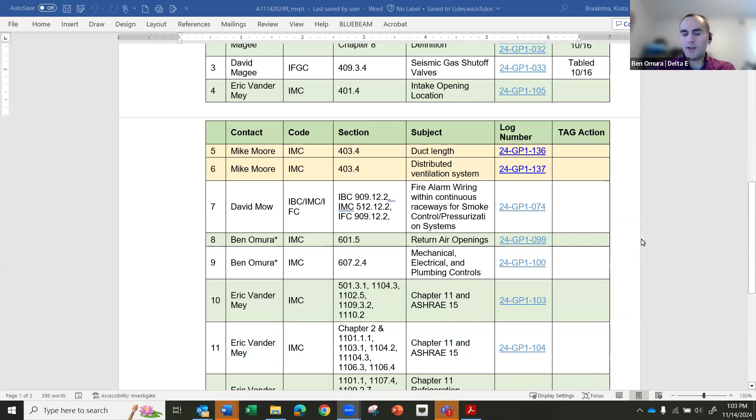Okay. All right. Let's move on to the next item on the agenda, which is to review and approve the agenda here. So take a quick look. Looks like we have the minutes from last meeting, and then the bulk of the agenda is taken up with code change proposals for the mechanical code and fuel gas code. And you'll note these two highlighted ones didn't appear on an earlier agenda. We got them as revised proposals just before the deadline closed for revised proposals.

Got it. And Krista, I did have a question regarding that. If we needed to have the MVP committee or the building code council provide direction if the tag was to review those and provide recommendations on them, or are we going to be limited to just discussion today for those two? I would say that we have a discussion and form a recommendation on it, and then it's up to the council and the committee if they want to consider them. Okay, sounds good.

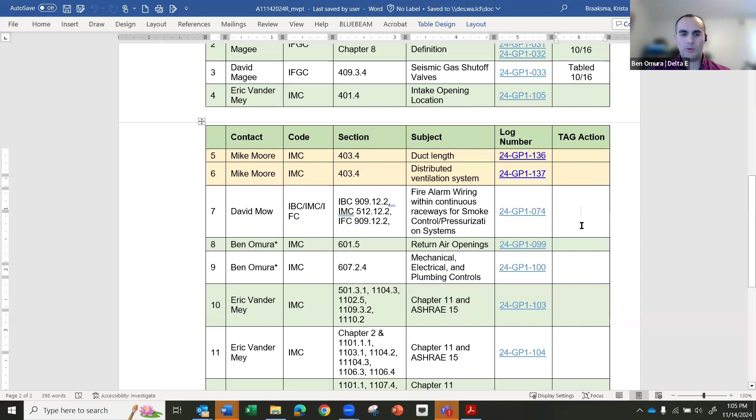All right, any other? I'll move for approval of the agenda. Okay. All right, we have a motion for approval of the agenda. Do we have a second? Yeah, I'll second it. This is Steve Simpson. All right, second from Steve. All right, any discussion regarding the agenda today? All right, hearing none. All those in favor of approving the agenda as shown here, please say aye. Aye. Aye. Aye. Any opposed? All right, hearing none, motion passes.

So let's go to the next item, which is to review the minutes from the October 16th MVP tag meeting here. All right, are there any comments, or as we scroll through, if someone wants to make a motion to approve, we can. I'd like to make a motion to approve the minutes as sent out and posted here on the screen. Second that. All right. Motion from Steve and seconded by Bill. Any discussion regarding the minutes from the last tag meeting? All right. Hearing none. All those in favor of approving the minutes from the last tag meeting, please say aye. Aye. Aye. All right. Any opposed? All right. Sounds good. Motion passes.

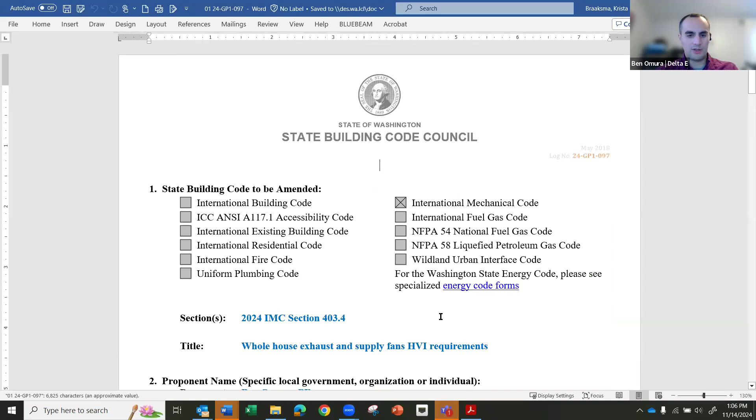All right, so we can get into the agenda here. Looks like we had 3 code change proposals that we had tabled from the previous meeting. The first being one that I had submitted regarding HVI requirements and certification requirements for unitary systems. And we had tabled it since we got some good feedback from some folks on the call last time, and I wanted to try to bring some other people that could provide testimony for it here. So the proposed change would be to provide an exception for unitary heat pump appliances, which may include integral ERVs, from the HVI testing requirements.

And we had heard some feedback at the last tag meeting that the HVI certification process did not seem to be so burdensome as for manufacturers to pursue it if desired. So I'll leave it there. I know Nick, you're on to maybe speak to this, and then if there's any others, please raise your hands so we can have a little bit more discussion on this item.

Yeah, I'll go ahead. I'm going to ask a question, Ben. So specifically, HVI deals with the sound at the design airflows. Is that correct? Yeah, and I think we have a couple of HVI standards here. I believe they're for sound, and I believe they also cover airflow as well. It's my understanding. So we have the 3 HVI certifications there that these would be tested under and certified under.

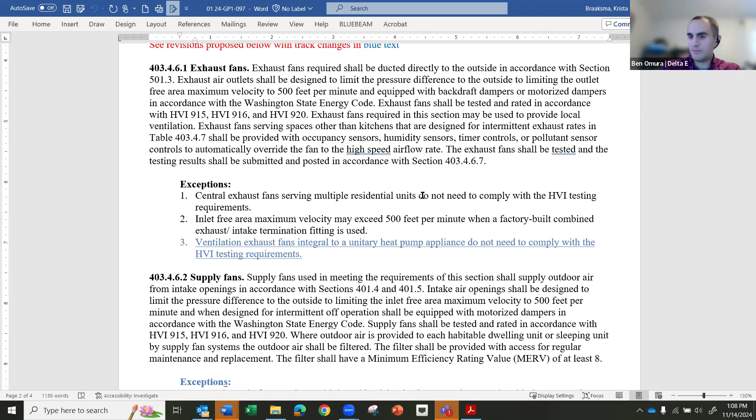Understood. And then I think I saw an update yesterday or the day before that was actually going to remove kitchen range hoods from requiring HVI certification. Is that correct? Yeah, I believe that is another one of the code change proposals that we'll be discussing today. Okay. So obviously we want to eventually consider things holistically, but we do want to try to look at things as isolated, siloed proposals to bring forward for more of a holistic review moving forward. Okay. Yeah, we'll hear if anybody else has any feedback for us.

Shailesh, go ahead. I think the purpose of this sort of testing is to make sure that we have adequate air being replaced or taken out. And so the testing is important in that case. We should not exclude any other equipment because it does save energy is one thing, but we want to make sure that it does take away the air or replaces as it was designed.

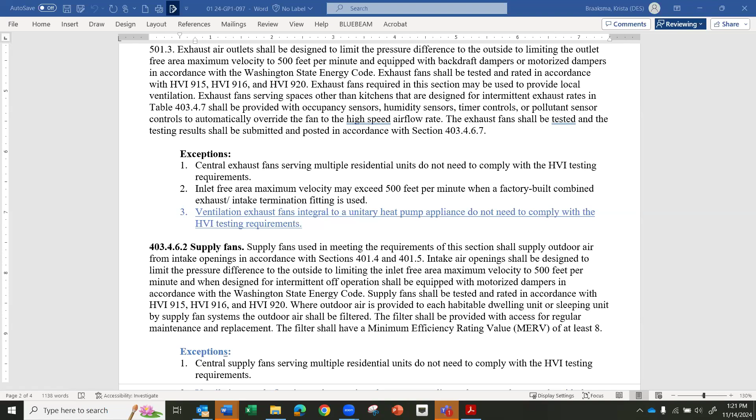All right, thanks, Mike. Any other comments regarding this code change proposal? Eric, good. I guess depending on the preference of the TAG, if we're not going to move forward with it, then you could just withdraw this proposal, and if you don't, that is another potential path, right? Thank you. Yeah, thanks for that. And I think maybe if the TAG doesn't feel like it's worthwhile to pursue at this moment, we can definitely remove it. And the language that's in the current mechanical code would remain.

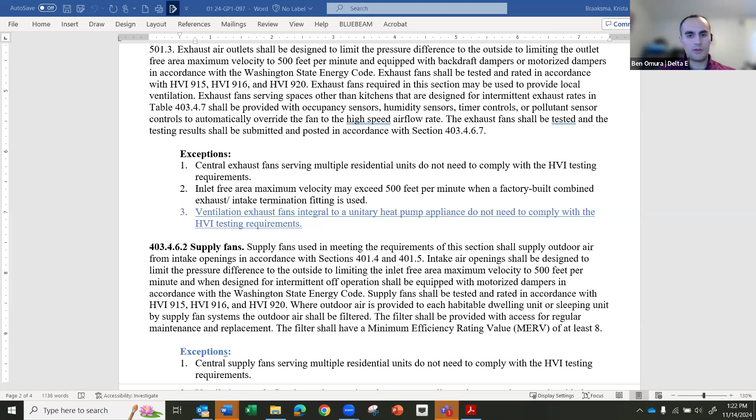So I don't see any issue with that at the moment, given there's a varying degree of uncertainty around what this would do and if there is still a pathway for these manufacturers to comply with the code as written. So I think we can move on, and I'll take a look and potentially submit a request to remove this code change proposal, unless there's anyone that wants to take any additional action on this item. All right, Krista, can we move on to the next one?

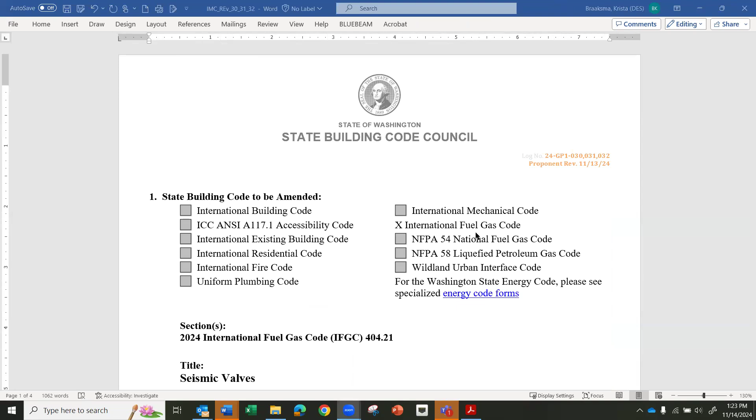And I apologize, I just got this revised version. It is posted on the website, but it was only posted this morning. So this is the first time. All right, and if someone had downloaded it, like me, for example, would it have the November 13th date on the bottom there? We're looking at it. Probably. Okay. All right. Yeah, it's like the older version. Okay. So this is one we had tabled from last meeting.

This is regarding, I believe, the seismic valve requirements for, I don't know if it's just natural gas or fuel gas lines serving buildings or structures. So we discussed this a bit at the last meeting, and I think the TAG in general had some concerns regarding the broadness of the language and some other things. So I don't know if Mike or others can speak to the revised version and what, if any, steps were taken to address some of those concerns.

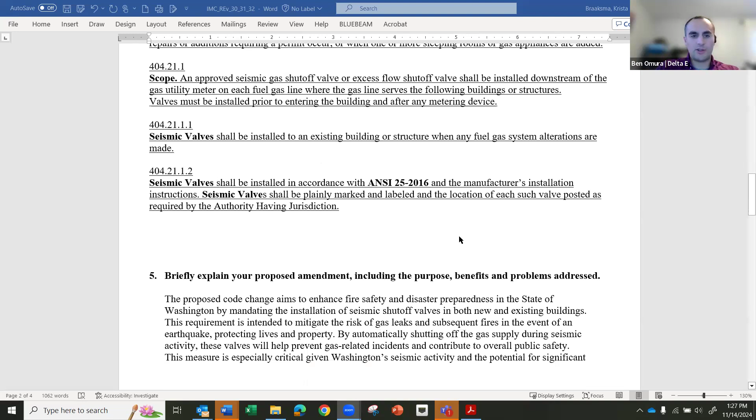All right, thanks, David. I don't know if anyone's had the chance to review it, so maybe we page through here as we discuss. Shailesh, go ahead. Yeah, on 404.21.1.1 seismic valve, it says when system alterations are made. Now, alterations to what extent? I believe my intent was in the case of, say, a meter change, or an addition of a gas appliance, or the removal of a gas appliance. An alteration meaning work done on the gas system that provides the service to the building or residence. Well, changing an appliance like for like, do you consider that an alteration?

Well, see, that's why I'm not really good at writing building code. This is my first time, so that's why I'm bringing it to you guys to maybe make it better, because I'm just a guy.

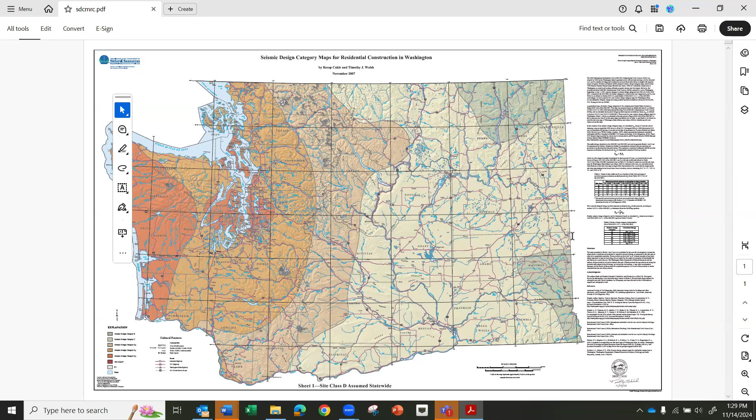Laura, go ahead. Yeah, and maybe we'll see as we flip through this, but I'm just curious if there is a map that shows the D2, D1 seismic categories included in this? And then the other question would be, does this apply to all different occupancies and restaurants? Like, is it applicable to residential and that sort of thing? Just curious if it's included in residential and all commercial projects?

Yeah, so originally I wanted it to be more targeted towards schools, healthcare facilities, memory care facilities, KinderCares, where kids are, things like that. But I included it in the groups E, H, I, M, R-1 through R-2, R-3, R-4. I don't know those classification codes really well, but I mainly picked those ones because they represented the places that had the most gathering of people within structures.

Right, and then, yeah, I think Krista had highlighted where that got added in the proposed language for 404.21. Steve, go ahead.

Okay, yeah. So I did have a prior conversation, but I'm looking at this and I don't see anything in here from the utility provider, or what kind of background history you can use to validate other than a map, identifying whether the infrastructure providing the gas service would or would not be able to withstand a certain level of movement before it became compromised, thereby nullifying a seismic valve. Without that context, I would not be able to say emphatically that I agree or disagree with any of these sections, because I would not be aware of what fragility the system is in its current state, meaning that based on its non-maintenance, its age, or the way it's structured, the gas utility provider could, in a small seismic event of 3 to 4, become compromised, and a seismic valve would be basically of no value.

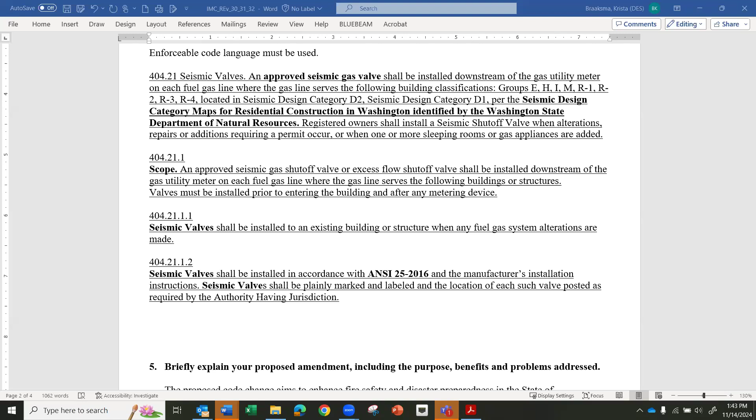And then another question I had is there are some very limited examples given for the cost that this will incur, and I noted that, I'm not real familiar with Mr. McGee's company, but it looks like they are an installer of these valves, and we saw an example for a small commercial facility, and then maybe a larger one, and I'd like to see a more comprehensive cost analysis done, because I think this will have a lot of effects on people and the costs.

Additionally, one of my questions is this is an installer who installs these valves. It does appear that there is a conflict of interest in this. And I'm concerned that this has a big cost associated with it if it gets put forth in the code. Anyway, those are my comments. Thank you.

All right. Thanks, Brian. Steve, go ahead.

Yeah, I want to tag into that last comment about cost. I did read this portion on the cost, but what's been addressed here is not identified in this cost analysis, and that is the fact that, if I'm correctly hearing, there would be additional needs for testing the system to the interior portion of the building, as well as if it were an old school gas appliance with a pilot light that had to be lit, then there's that added cost versus electronic arc or another form of ignition.

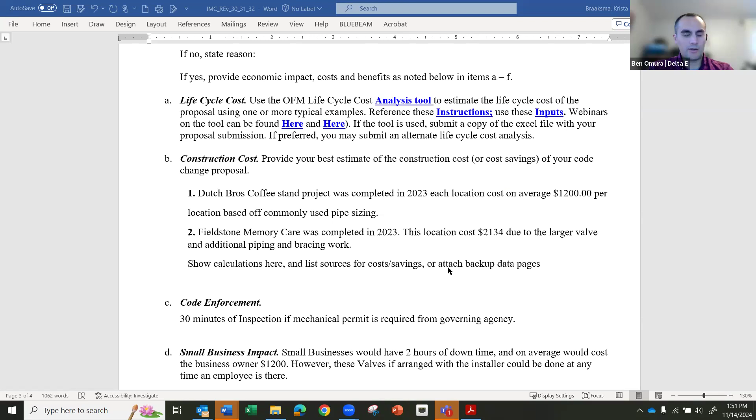I spoke with one of our servicemen who had previously worked in Southern California, and they had a number of these installed across their territory. Some of these were tripped from, you know, you could hit it with a trash can and they would get tripped. What I understand is that organization had adopted an approach that echoes what was mentioned previously, that it becomes a longer process to get turned back on. And it became such a nuisance that they were charging people when they would trip it, so that people would be really careful to not bump that.

I think safety is paramount. I just think we need to really look at, to use a gas term, the downstream consequences of this, and consider the operational costs, the installation costs, the potential impact to disadvantaged communities that are going to be forced to upgrade things. And also, I haven't had time to evaluate this, but it looks like we changed the occupancy classifications, and I'd like a little more time to look at that than we have in the scope of this meeting. Thank you. That's my comment.

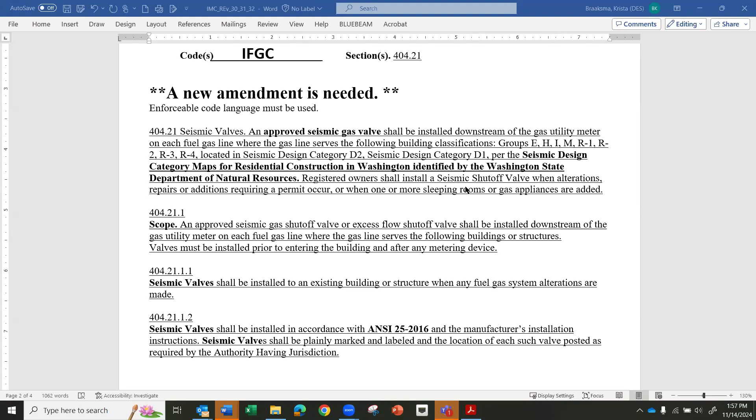All right, thank you. All right, so motion is to table this item, and would you want that to include not only this code change proposal but the other related one, GP 133 as well? Since I'm the motion maker, I think it would be probably the same kind of conversation, Mr. Omura, and once again, I would agree to that. As a second, I agree to that too. Right. So motion would be to table this code change proposal as well as GP 1-033 until the next TAG meeting, which we should be scheduling shortly.

Any discussion regarding the motion? All right, hearing none, all those in favor, please say aye. Aye. Aye. Aye. Any opposed? All right, motion passes. So thank you for the discussion on this, and we'll look forward to hopefully resolving TAG discussion on it at the next meeting. All right, let's continue.

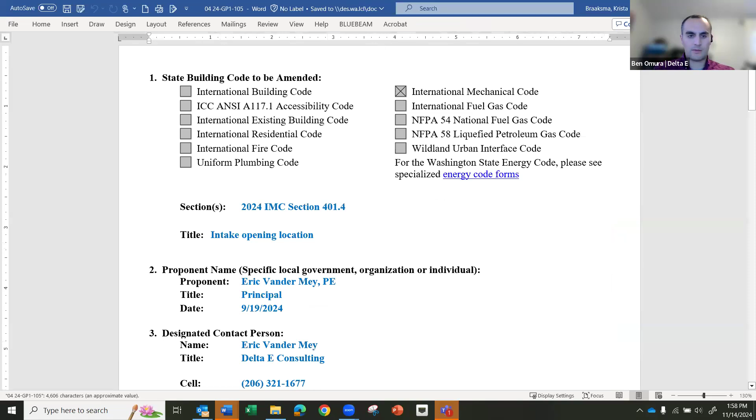So Chris, I don't think that we've looked at this one yet. Is that right? No, we haven't on this one yet. Okay. And it looks like it's editorial more than anything else. Correct. This is Eric Vander Mey. This is an editorial correction to move up this exception that's kind of floating at the end of the section to be under item 2 of section 401.4. This exception is just applicable to item 2 only, so it's really just a renumbering editorial correction in the code for clarity.

All right, great. Any discussion? And Laura, go ahead. Yeah, I remember us talking about this during the TAG, and so I'll make a motion to accept this code change proposal as written. Thanks, Laura. Is there a second? This is Bill, I'll second that. Thanks, Bill. All right, any discussion for this proposed change?

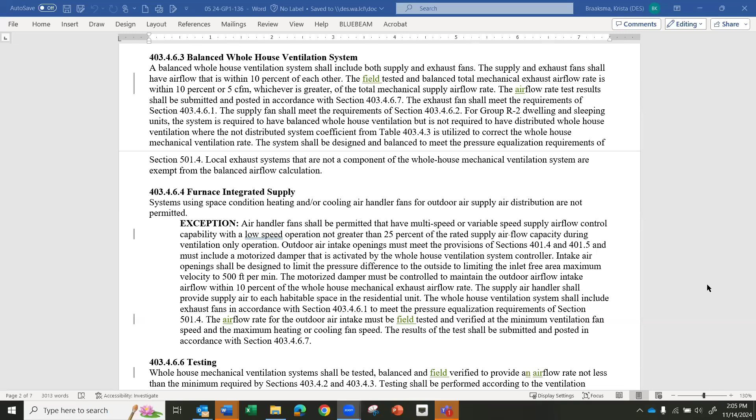Just clarifying airflow, using consistent terminology throughout. So airflow instead of flow. Again, field testing, where field testing applies. If you'd scroll down again, please. Okay, thank you.

So again, more clarifications around laboratory testing underneath number 1 there. In number 2, I just collapsed number 3 and number 2. Number 3 is designed in accordance with manufacturer's installation instructions. So I just started number 2 off by saying the system shall be designed and installed in accordance with manufacturer's instructions. And then all this information about how to test the airflow, I just parked it in section 403.4721 because that seemed to flow better with cross-referencing from other sections. So this is essentially the same as is currently written. It just is trying to clarify the requirements here.

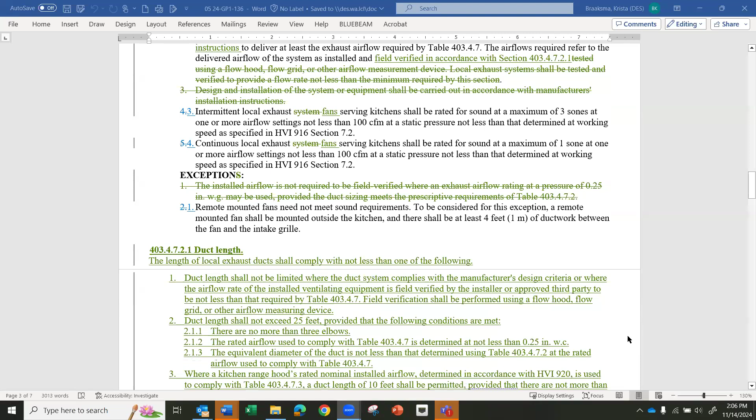I use exhaust fans instead of exhaust systems, where fans are appropriate to reference, in number 3 and number 4. And then exception number 1, I did retain that. I just put it elsewhere because it flowed better, in my opinion, to put everything underneath duct length. So really, when you're confirming duct length, I'm proposing there are 3 options. Currently, there are 2 options in Washington's code. The first is that you do this field test and you verify the airflow on site. And the second is that the ducts are prescriptively sized using this prescriptive exhaust duct sizing table.

A limitation of this exhaust duct sizing table is that it only goes to 125, I believe, CFM. And there are certainly range hoods that far exceed 125 CFM. But instead of this table, we use the ASHRAE 62.2 table, which is right below. Thanks, Krista, doing a great job there. This shows the duct diameters that are permitted for rigid and flex duct for various fan airflow ratings at a 1/4 inch water column of pressure. So this is, again, copied right from 62.2. It's more flexible than Washington's current code. It allows sizing to higher airflows than are currently permitted by the table, and again is aligned with 62.2.

If you'll scroll up just a little bit, Krista, so that would be option 2, prescriptive sizing in accordance with 62.2 in place of the current prescriptive exhaust sizing table. And you don't have to go to 62.2 to do the prescriptive sizing. It's right here in the code. The third is using nominal installed airflow, which is a recently released metric from HVI in HVI 920. And it basically just looks at the static pressure that a kitchen range hood is likely to encounter when you have 10 feet of duct and 2 elbows.

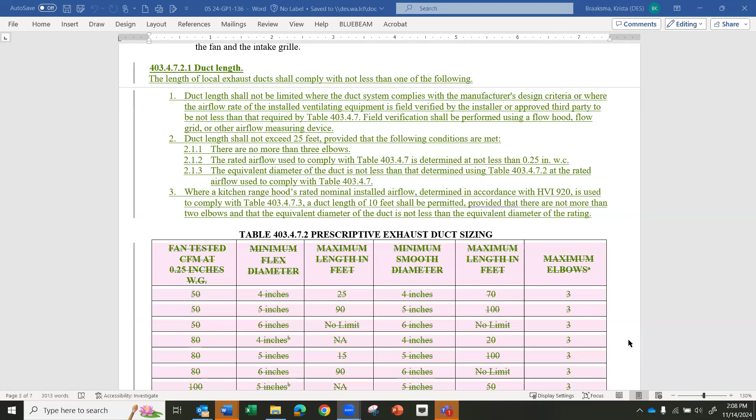And then it looks at the airflow that you're going to see based on the fan curve for that range hood, the certified testing points. You calculate the airflow of the range hood based on that system curve fit. So again, it's a rated value, and it applies to 10 feet or less of duct and 2 elbows or fewer. So just wanted to recognize that as being a way to prescriptively size ducts as well.

And I should point out that there is a slight error in number 1 that I noticed in reviewing this. We should cross out "where the duct system complies with the manufacturer's design criteria" underneath number 1 in the first line there. That's already required up above. And it's not an either or, it's basically saying that where your airflow is field verified here, that's one way to comply. Okay, if you scroll down a little bit more, please.

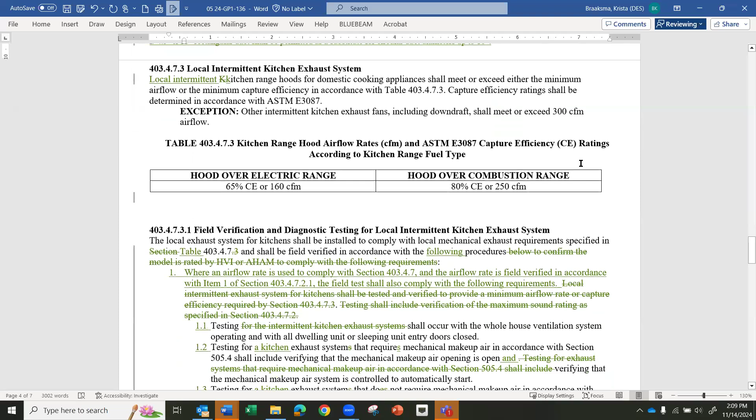All right, the next thing is just clarifying the kitchen range hood requirements and diagnostic testing for range hoods. And one thing that I saw in here is that instead of referencing again how to test the airflow, we just go back and reference section 403.4.7, how to field verify the airflow. And then when you're doing this airflow test, you have to do these things. So this is just tying everything together.

And I also brought in a reference to capture efficiency value, which is currently recognized in the code, but it's not required to be field verified here. It's not referenced at all. It's just saying you need to field verify the rated airflow value. But really, if you're using a capture efficiency value for compliance, you should be field verifying that as well. So a lot there. And maybe this could be workshopped. If you guys are just seeing this for the first time, I'd be happy to work with any interested parties if you need some more time to digest it, but happy to answer any questions now.

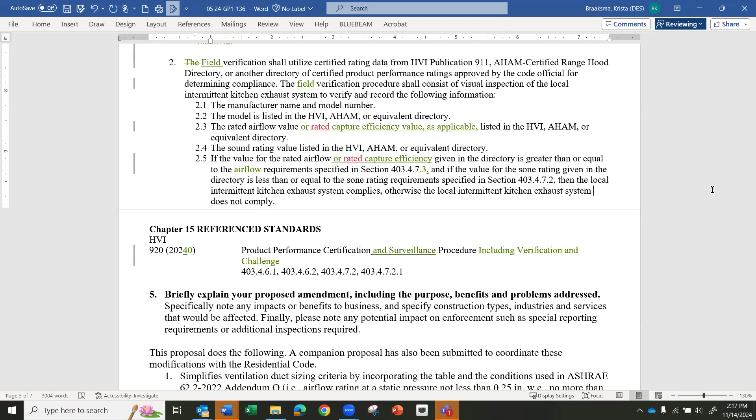Everything that's certified by HVI right now is certified in accordance with the latest version of 920. So that's the one that's in effect. So it's just keeping pace with 920. The latest version does include the metric for calculating nominal installed airflow, which again is the intersection of the typical system curve and a fan curve to estimate the in situ performance of a range hood as far as airflow goes. And so that's the primary difference here, just the availability of accessing that rating as an option as proposed in the code.

Yeah, thanks for going through that. Great. Any other questions or comments regarding this proposed change? And I don't know if we would want to make a motion to provide just kind of a general direction that the TAG would propose, or we could, of course, have this tabled for additional discussion at the next TAG meeting and give folks a little bit more time to evaluate the proposed change.

Laura, go ahead. Yeah, I'd like to propose to table this code change proposal till our next meeting, just to give me a little more time to go through the proposed changes. Okay, that sounds like a motion. I'll second it. All right, Justin, second. Motion and second. Any additional discussion regarding this?

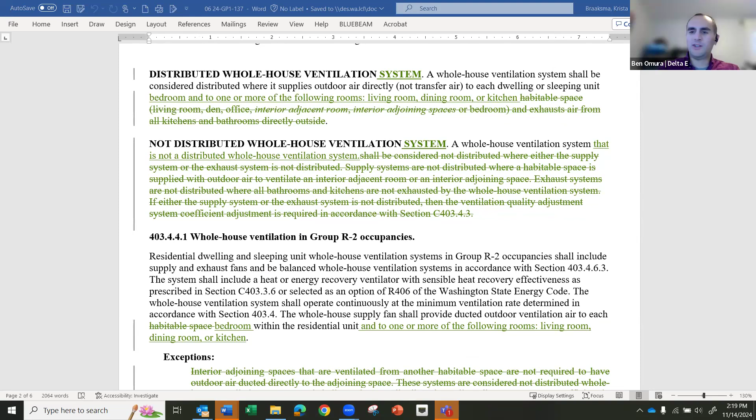And this is the same as the previous one. It was a late poster. Came in with the other one. And Mike, I think you were the proponent on this one as well. If you would be so kind to provide a little bit more background on the intent and what the proposed change would be doing here. You bet. And thanks everybody for hearing that last one. If there are any questions in the interim, I'd be happy to respond to those. My email and contact information are on the proposal.

So this one is looking at better aligning the current mechanical code and residential code eventually, because I have a similar proposal that'll be submitted there with the model code, with respect to what is considered distributed. So right now, the model code says that a system is considered distributed when it provides outdoor air to each bedroom and to one or more of the living room, dining room, and kitchen.

And that is contrasted with Washington State, which requires distribution of outdoor air to each habitable space, which in parentheses includes interior adjoining spaces, and you need to exhaust air from all kitchens as well as bathrooms directly outside. So if this is one system that's exhausting air from kitchens as well as other spaces, that's a direct violation of the mechanical code, which requires that separate exhaust be provided for kitchens. You can't combine kitchen exhaust with environmental exhaust from like bathrooms.

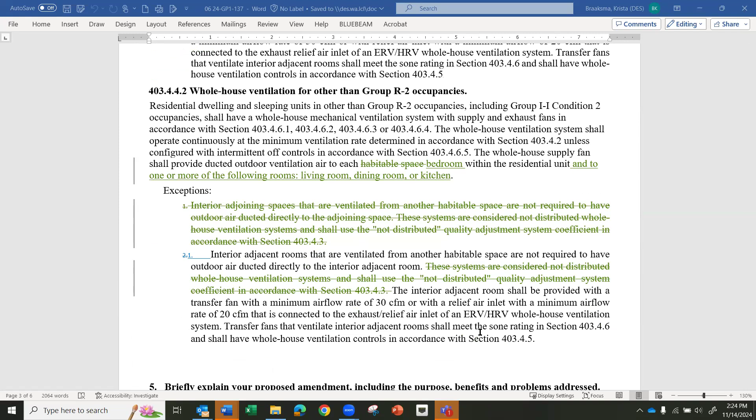In the rationale, I've got some information about different studies on where people spend their time in dwelling units, and basically if you're covering the spaces shown in this proposal that are required in the model code for distribution, around 89, 90% of the time you're delivering outdoor air to a room that has a person in it

when the place is occupied. So pretty good for distribution there, and just simpler to comply with, and it fixes a problem right now that whole house distribution systems have to exhaust from the kitchens, which conflicts with the code right now. So if there are any questions, I'm happy to answer those. All right, thanks, Mike, for going through that. Open it up for some discussion here. Eric, go ahead.

Yeah, Mike, so the interior adjoining spaces that we typically see are bedrooms and offices. Those are the typical ones in most residential multifamily layouts. So that's not typically a space that's exhausted. It's typically a space that requires the ventilation. It could be a bedroom, it could be an office. But those are the spaces required by the building code to have the permanent opening.

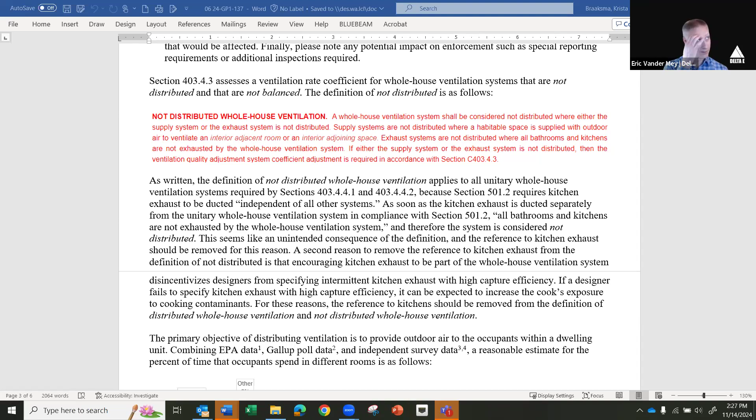Certainly, yeah. So in the case that an adjacent space is a bedroom, it would be covered under this. As I proposed it, outdoor air would be required to be delivered to it. In the case that it's an office, I have not addressed that. So if we want offices in, that could certainly be put into the list here. Maybe there's a difference in a closet or something between the two types of rooms, but that seems like a reasonable thing to include as well.

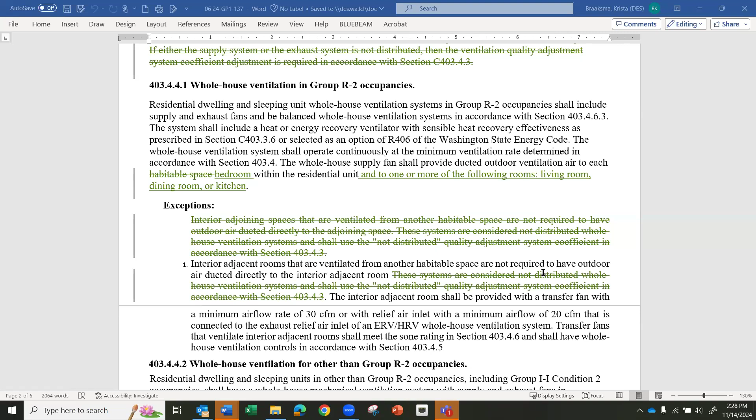And then habitable space just seemed so much broader than these rooms and can be just about any place really. So that's what I was trying to avoid, having a requirement to supply outdoor air to a laundry room, for example, when your time in there is really low.

Yeah, I guess it's big enough. Yeah. Right, closets, laundry rooms, or those habitable spaces. Got it. And I guess quick follow-up question, Eric, are you aware if the habitable space term is defined anywhere except as part of a definition of other terms currently?

I don't think so. Defined in the building code? Is it in the building code? Pretty sure. Yeah, I mean, right now in the mechanical code, it looks like it's somewhat defined as part of the definition for distributed whole house ventilation. Yeah, it is defined in the building code. A space in a building for living, sleeping, eating, or cooking. Bathrooms, toilet rooms, closets, halls, storage, or utility spaces or similar areas are not considered habitable spaces.

So that's kind of been the language we've been using. I went back to the 97 code, the 97 Washington State VIAQ code, and that's been the term that we've used for at least the last 30 years or so. And where I think there's a confusion is that there's that parenthetical phrase within the definition of distributed whole house ventilation. So if we scroll up to the top there,

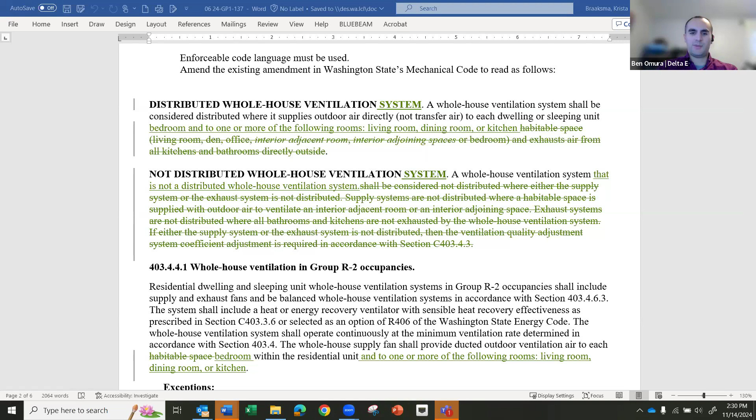Yeah, I mean, does it make sense to have that within the habitable space classification as it is more of a broad term, I guess would be my question. May I interject just for a second too? Sure. Sorry, Jonathan, I saw you had your hand up. It's relevant information to this conversation, which I was trying to be very patient.

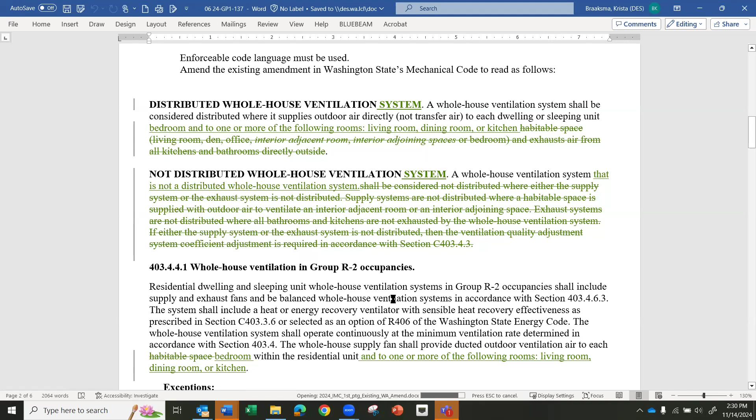But you know, in the energy code, we have referenced the primary living areas. Not that this is energy code. That excludes typically utility rooms or bathrooms, right? But the living rooms, family rooms, playrooms, offices, and those sort of spaces are considered the primary spaces.

But my concern with all of this actually is the language here says one or more, and in enforcement or education doing technical code, one means that you only have to go to one of those spaces and you're deemed compliant. And so that language should be changed, because then that could just deliver to the living room, and that is one, and I would be compliant with my distribution. Well, it says all bedrooms and one of the other three types, right? It just says one or more. When you read his language in the green, it says one or more.

That's correct. That's the intent of the proposal, to align with the IMC and IRC model codes in that regard. And that is each bedroom and one or more of the following. So you don't have to do living room, dining room, and kitchen. You just have to do living room, dining room, or kitchen. Typically, if you're doing living room, you're getting the kitchen too, based on open concept layouts, and the dining room is often connected to the kitchen as well. So you're probably getting air to all three of those spaces in typical layouts if you're delivering it to one.

How does it work for a studio if your bedroom is your living room? Right, then you have two spaces covered. So if you remove the one or more and just said into the following spaces, at least those spaces would be included. I'm telling you from the enforcement side, I'm going to get 500 calls on the hotline about this. It says one, and that's what they'll do. And the other spaces won't get ventilation when they're separated off. Not all homes have great room concepts.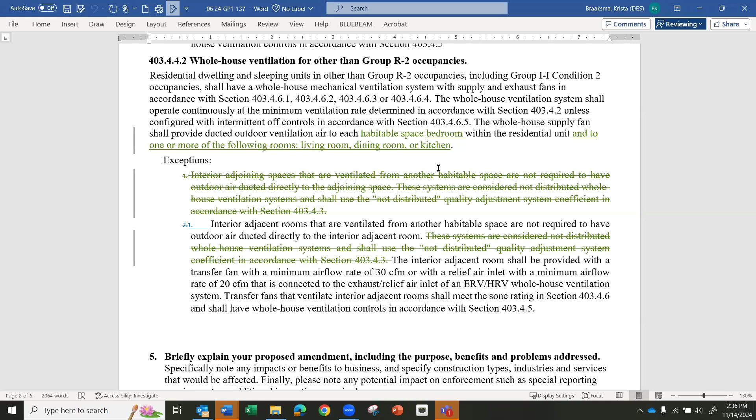Okay, but exhaust from the kitchen is required as part of the distributed system, right? If you scroll up, Krista, to the definition, the whole house system has to exhaust from the kitchen as well. And that's counter to where the code's trying to go with ensuring better capture efficiency from the kitchen exhaust, not low continuous ventilation rates, but higher ventilation rates with better capture efficiency during a cooking event.

So the Washington State Code requires the local exhaust above the cooking appliance, and you could have general room exhaust in the kitchen also if you wanted. But yeah, I understand removing the general exhaust from the kitchen allows you more flexibility on the adjustment factors. So I think there's definitely some good cleanup here. We just have to decide how we want the language to look, and maybe this is a separate working group to work through it.

So yeah, I'm not in disagreement. I would like it to be clear enough, since it's already very confusing for folks. I get an astronomical amount of mechanical questions as it relates to residential properties. I am no mechanical expert, which is why I've been participating the last 2 code cycles, learned by drinking from a fire hose. But I do teach a lot of classes on this.

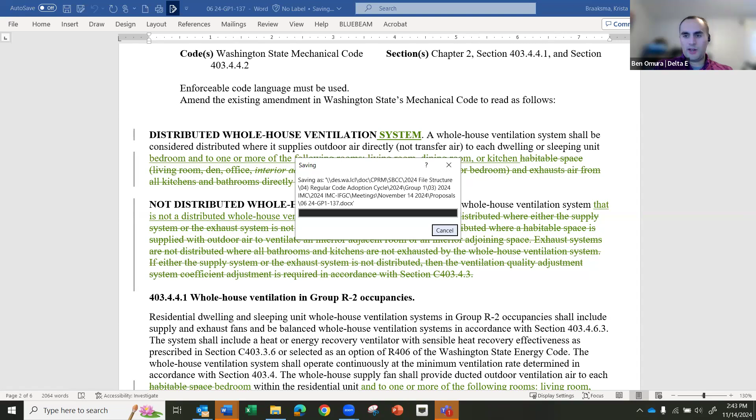So I'd entertain a motion to table this one, similar to the previous proposal. So moved. All right. Sounded like Justin. I'll second the motion. All right, second from Laura. We have a motion and a second to table this item till the next tech meeting, and as we previously discussed, we'll have the working group dive into it a little bit more. Any other discussion regarding this item? Hearing none, all those in favor, please say aye. Aye. Aye. Any opposed? All right, motion carries. Thanks for the discussion, and let's continue on.

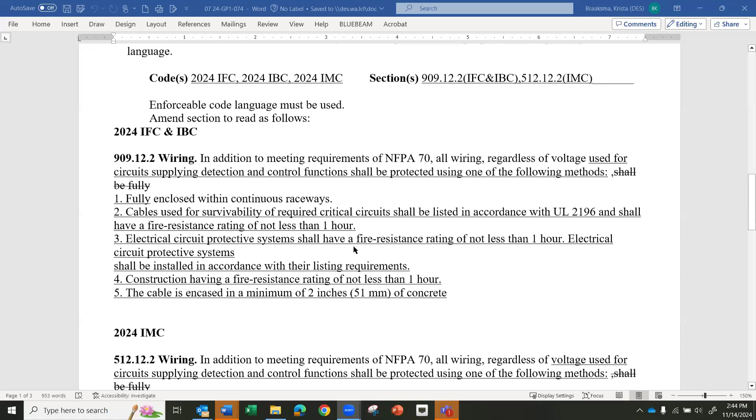And David was not available today and just submitted some rationale. My understanding is that there's a parallel, or it's all within the same proposal for the IFC and IBC as well. Correct. And this is addressing smoke control wiring. And I believe he did send in a written statement. Is that correct? Yes, I'm trying to find it here. Okay. And if you're trying to look at this one, note that the section numbering changed for 2024. If you're looking at the 2021 code, this would be section 513.

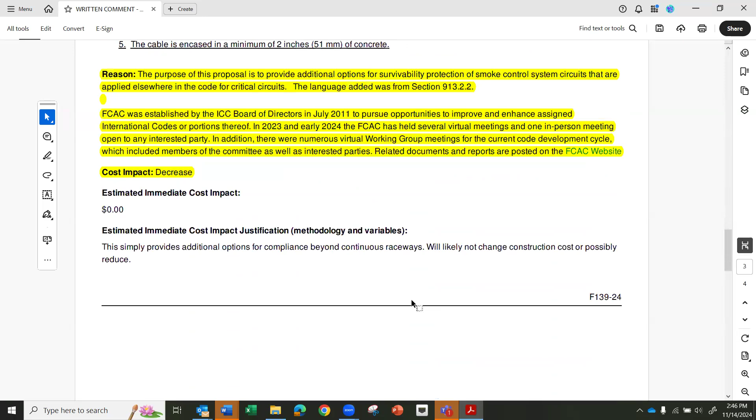So this is what he submitted on behalf of the IFC tag. Right, and is this from the Washington State tag or from the ICC tag? This first portion is from the Washington IFC tag, or from a representative of the IFC tag. And then the rest of it after that first page is directly out of the ICC proposal process. And this is also on the website.

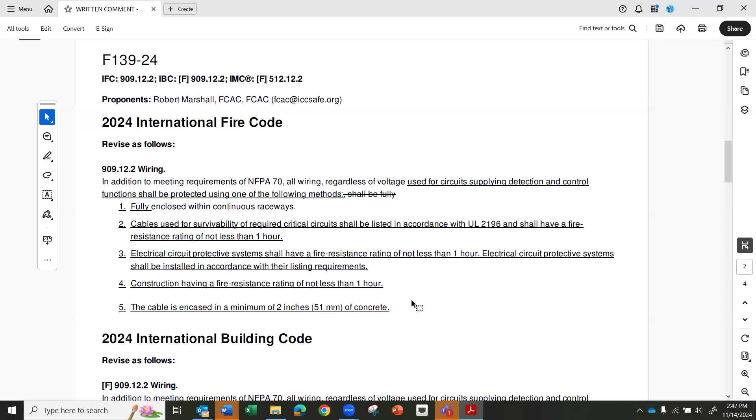And maybe Krista, can you clarify, the ICC info included, is that for the next code cycle, or is this taken from what was discussed for the model code draft that we're looking at? No, this is for the 2027. Okay, thanks. That's what I was assuming.

And I guess similar to the two proposals we just discussed, was this also submitted when we did the review at the council and committee for tag deferral? For some reason, it made it onto the IBC and IFC list, but it was not present on the IMC list, even though it addressed the IMC, so it was added to the IMC list within a day or two of that council meeting. Gotcha. Okay, thank you.

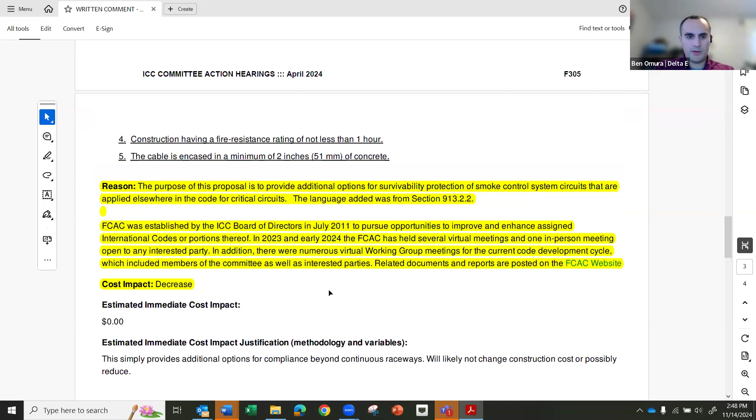All right. Can you maybe hop back to the proposal? I don't know if anyone had any initial thoughts here. Eric, go ahead. So just to be clear, this is just correlation between the codes, essentially. This is a 2027 IFC proposal that we're bringing into the 2024 codes. Am I understanding that correctly? That's correct, that's what they're looking to do. This is covered under the fire committee at the ICC level. Okay, understood. Thank you. And it sounds like the IFC tag has previously reviewed this and recommended adoption for the Washington State Fire Code.

And along that line, there will be a codes correlation tag meeting on Tuesday. The council is currently looking for volunteers from this tag to serve on that committee or attend that meeting as well, so if anybody is available, we would love some volunteers. I apologize, what was that date again? That was next Tuesday, the 19th. I will attend, but I wouldn't rely on me to be your mechanical expert, but I will be there to help. I am available if necessary. Thank you, Jonathan. Anyone else?

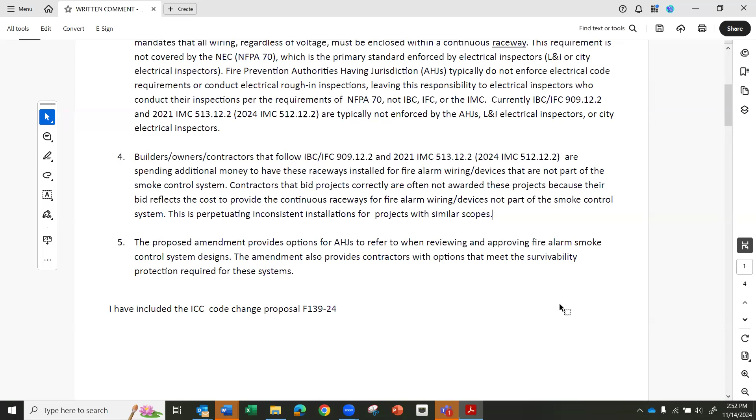Brad, go ahead. The only big change I see from what's standard now is probably the building management system for HVAC controls, where their control wiring would have to be in conduit or protected, which could be a cost impact. Right now they're typically running that exposed through drop ceilings or mechanical spaces. But if there is any control function coming from the building management system, all that wiring would now have to be in conduit. That's what I see in my limited time looking at this.

So I think that's a valid point. And it's a question of, for systems that are somewhat interacting with the smoke control system, to what extent do you need to have it integrated into these requirements?

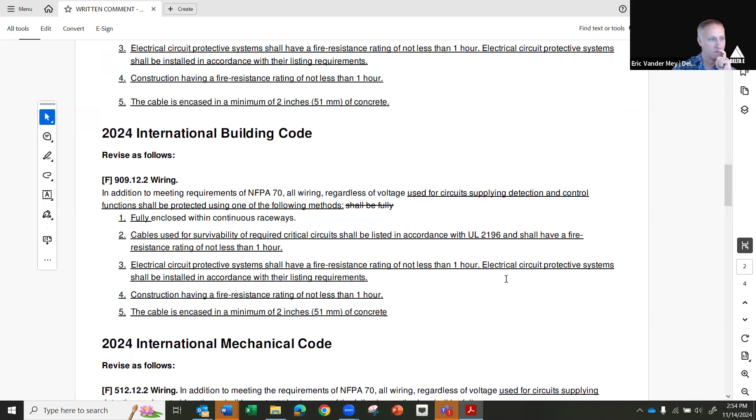I mean, typical stairway and elevator shaft pressurization systems only have to comply with specific sections of 909. So I'd have to chase down if this would even apply to that, or it's only a full-blown smoke control system. Because this is part of 909, I guess 12. So it's not going to apply to a typical control system just yet, but definitely if you're using a BMS control system that's part of a smoke control system, it's going to have to meet all the UL listings and everything else. So.

Brad, did you have another comment, or did you still have your hand up? No, I just don't know what I'm doing. Okay. Try and put it down. I don't know. I think the Zoom features are tricky for everyone at this point. I can do that. Thank you.

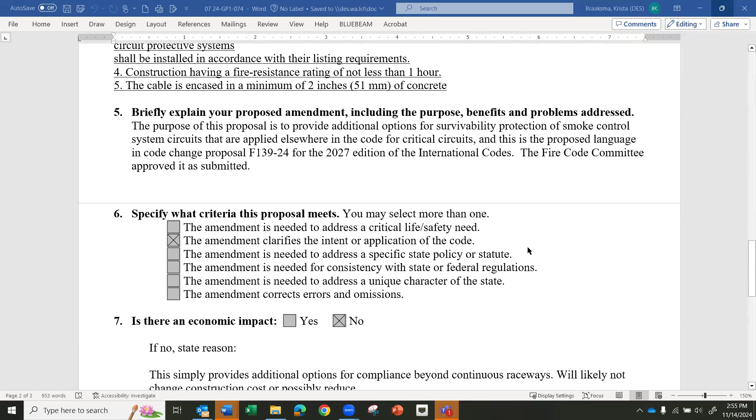All right. Any additional discussion, or do we want to provide a motion to follow along, or is there other discussion or investigation needed? Would you consider a drop down ceiling a raceway? I don't think I would, if you're asking me, but would it be difficult to create a small section of those drop down ceilings to be raceways instead of the large amount of cost he has in conduit? Could leftover building materials meet that requirement? I'm not very familiar with the smoke system installations. Just not a fire guy.

I'll take a risk at answering that. I would say no. You'd be changing the whole electrical code to try and make a drop down ceiling a chaseway or electrical conduit. So. I mean, I was trying to say that there's a way to make a section of the drop down ceiling into a raceway, being sealed and appropriate for the fire code, not to have the whole ceiling. Because it doesn't define a raceway, so all you need is a channel that meets the fire code, is my understanding. Am I incorrect with this? Some sort of fully assembly, 6-sided assembly that has at least a 1 hour fire rating?

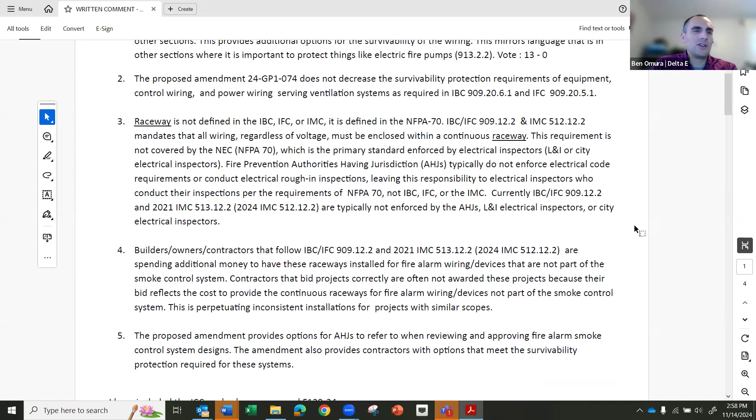I don't know. Does anyone have any thoughts on that? I think in the letter, I think it was noted that raceway is not a defined term, and I think it was item 3 in the letter. And I guess the justification was that by adding in the other options, it provides additional means for AHJs to provide enforcement. Oh, sorry, it was, yeah, up there, item 3. Yeah.

Laura. Do we want to just hold off on this code change proposal until after, it sounds like there's a meeting on Tuesday. So do we just want to table this code change proposal till then? Yeah, well, and they're kind of looking for our recommendation. Oh, a recommendation from us. Yeah, I'm not sure if I have much input on this one. And I guess would it make sense to defer the requirements to the fire or building code? And I think the building code, they have a tag meeting going on right now as well, and this is one of the items that I believe they're supposed to be looking at.

So they may find the same as the fire tag did and recommend adoption, or they may be doing something different with it. But yeah, like Krista said, I think it would be helpful if the mechanical tag could provide some direction one way or another on what the tag would recommend for this. And I think it would be fine to defer to their expertise and make the correlating changes to the mechanical code. Okay, well, yeah, I can make a motion to defer this code change proposal to the building code or even the fire code tag teams to see if they can provide some direction.

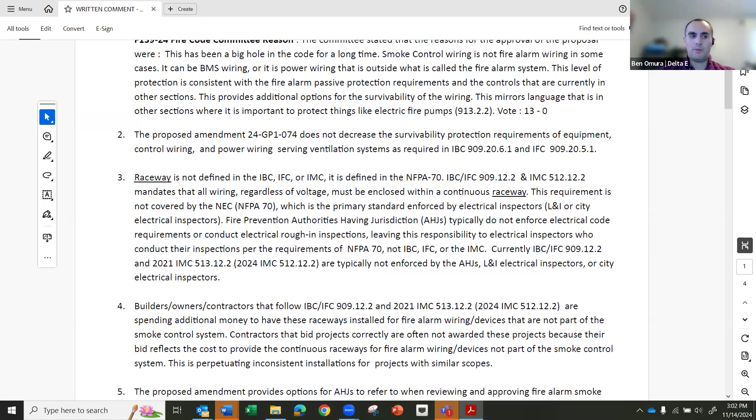Was there a mechanical TAG approach? That's what we're discussing right now. If we want to recommend adopting it, recommend providing maybe a clarification on the proposed change, or recommending not adopting it as written. So we're reviewing this proposed change and providing just kind of the recommendation from our technical advisory group on what the State Building Code Council should do with the proposed change, if it should be moved forward into further rulemaking or not.

I'll second that. All right, I did do some deep dive research on this, and they talk about boxes to fiberglass to lots of different potential systems being used as raceways. Just in case people are hung up on that, because I was really concerned about adding costs. It is a thing, and the gentleman talked about a new scope of work that may be included by this. And since our raceways weren't defined, I was very curious how costly that impact would be.

And there's about 20 references on this page of different types of raceways, from galvanized steel to non-metallic conduit to flexible metal conduit, I can keep going. Non-metallic conduit ground surfaces, liquidtight flexible metal conduit. You get the idea. So there's lots of ways to make a continuous raceway from what I'm reading here. Gotcha. Okay, thanks, Jonathan. So we have a motion from Laura and a second from Jonathan on it.

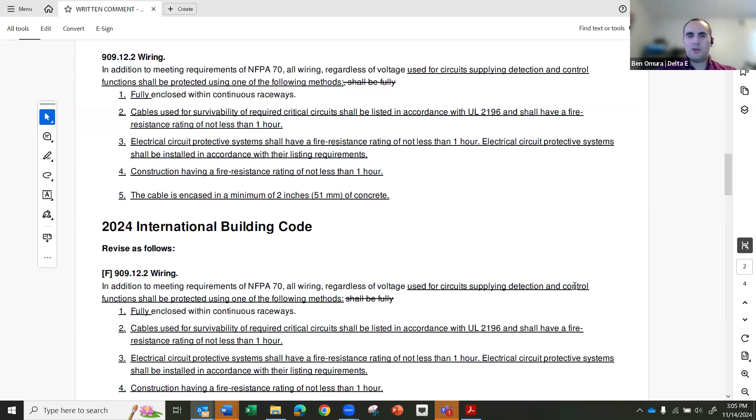Right. So yeah, there's some duplication here for requirements, and the section in the mechanical code for the smoke control requirements has a lot of redundancy between the codes, it's my understanding. But I guess, Shailesh, do you see an issue with that? Well, if this is required by other code, and it is listed here for just helpful information, duplicating is not a problem.

If it is creating a conflict between fire code and mechanical code, then we need to resolve it between the two code bodies, and then we fix the fire code as well as the mechanical code in that case. Got it. Yeah, and like Krista mentioned, there's going to be the meeting next week to start looking at some of these code correlation items, so there aren't those competing requirements. But as proposed currently, it looks like they do have the same language for all three codes.

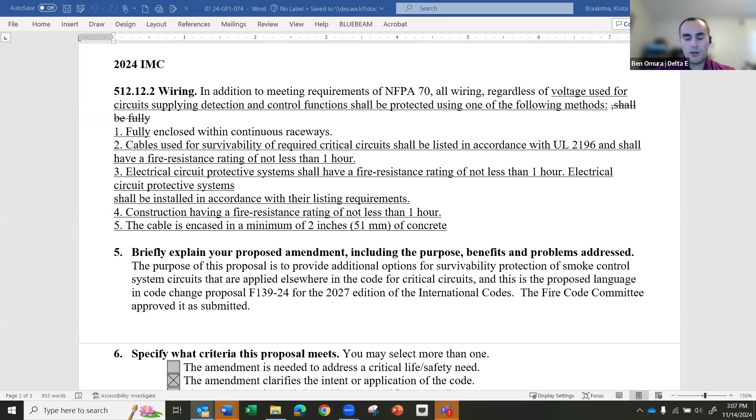All right. Any additional discussion here, or take a quick vote on the motion on the table? All right, hearing none. All those in favor of deferring recommendation for this code change proposal to the findings of the building and fire code TAGs, please say aye. Aye. Aye. Any opposed? All right, motion carries.

Right. So this next one is one that I submitted on behalf of the TAG for section 601.5. This is regarding return air openings. We had some discussion when reviewing some of the model code changes as well as the existing amendments for this section on return air location requirements, and also around what is classified as a return air system and where these can be located. So I tried to put something in here to at least create a placeholder for some discussion, but definitely want input from the TAG on this and see if we want to refine this any further.

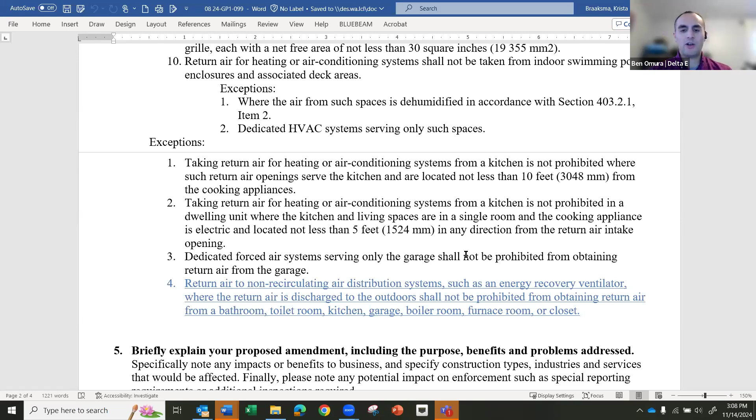But the thought was to provide a little bit more clarification on where return air could be taken. I put in the proposed exception for this section regarding non-recirculating air distribution systems like an ERV, providing the allowance that they should not be prohibited from obtaining return air from a bathroom, toilet room, kitchen, garage, furnace room, or closet for air that's just being routed outside of the building and passed through the heat exchanger.

And I think we had, as the TAG, looked at some different sections, and the model code had added in some language here that we had some discussion around. So leave it there. Shailesh, go ahead. So return air is something that is reconditioned, right? Not per the definition in chapter 2. Or if this air we are taking from places where it is not allowed to recirculate, it could be exhaust air in that case.

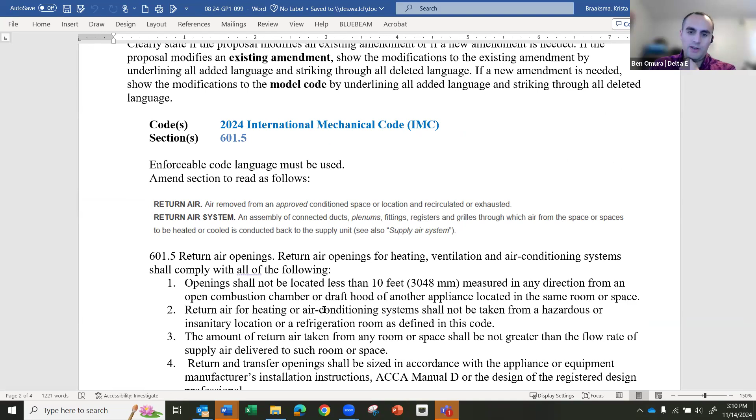That's correct. So the chapter 2 definition for return air is air removed from an approved conditioned space or location and recirculated or exhausted. Oh, so that "or exhausted" is an issue then in that case, return air. Right.

So that was kind of part of the question, if these return air requirements in this section would apply to a system like an ERV, and we would obviously not want to prohibit an ERV system from drawing air from a bathroom or someplace like that where we want to utilize that exhaust air for energy recovery.

Laura, go ahead. Yeah, I was gonna say, I do remember that we talked about this as a TAG, and I support this code change proposal, so I can go ahead and make a motion to accept the code change proposal, and I'll suggest that we accept it as written. All right, motion on the table. Is there a second? Sure, this is Kevin. Second, Kevin, thanks.

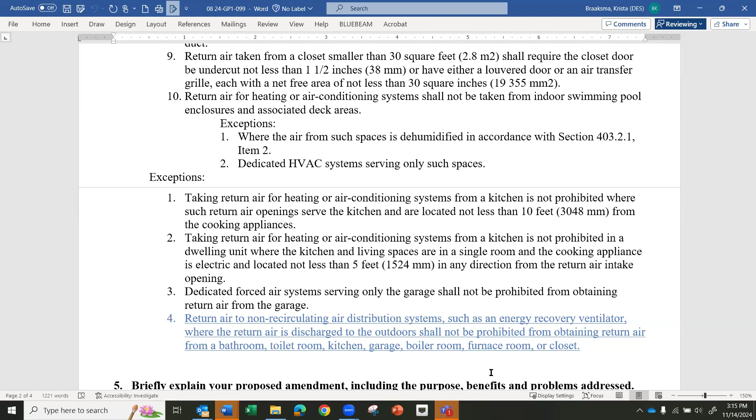Any other discussion here? All right. So the motion is to recommend adopting the proposal as shown. All those in favor, please say aye. Aye. Aye. Any opposed? All right, motion carries.

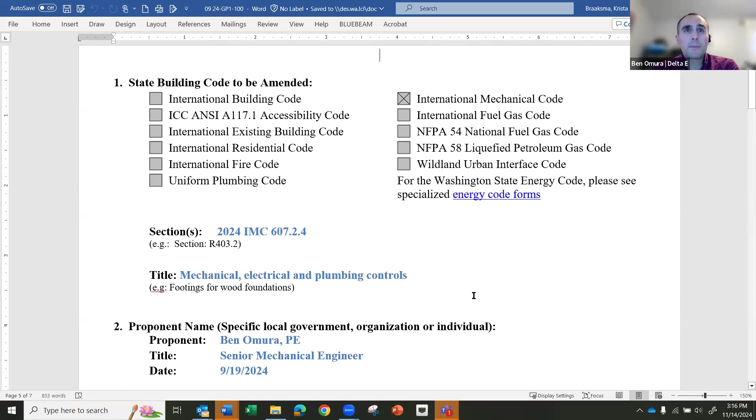Let's see. So the next one is another one that we had discussed and I had submitted on behalf of the TAG regarding control wiring in duct systems. So this was a new model code section that got added, I believe. And we had some discussion on the requirements for this and where it particularly would not make sense for some existing conditions where you're, for instance, doing a rooftop unit replacement.

It would be burdensome to have to replace all the existing control wiring that may have already been routed in a duct system. So that's what I had put in as exception number 2 there. Shailesh, go ahead.

So here we say permitted to be installed, or you want to say to be left in place. So install meaning reinstall, or left in place, is that what you are referring to? Meaning they don't have to change. Yeah, I think that's a good point. So yeah, I think I would revise that to say shall be permitted to be left in place or reconnected.

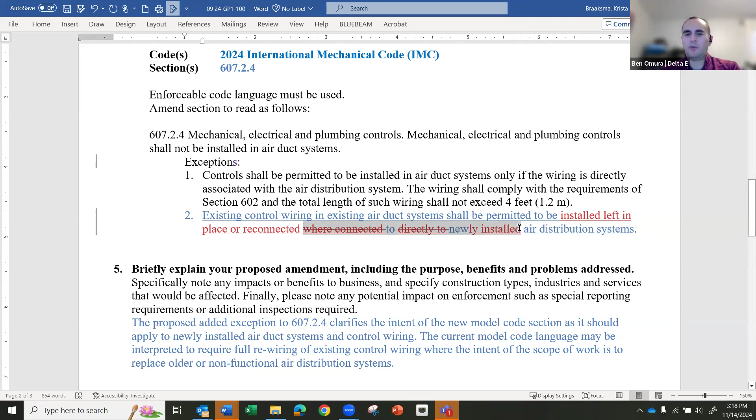And then maybe just reconnected to newly installed air distribution systems, and delete the last part of that sentence. Or reconnected to newly installed. Right. And Brad, I think you were one of the ones that had spoken to this item previously. So I don't know if you had any comments on if this made sense. Yeah, I think it did.

It was directly related to package unit changeouts, and since probably the 80s, they've been running the thermostat wire up in the ductwork and up through into the package unit. On new installs, we've gotten completely away from that, but on these change outs, that was the impact of having to either replace that wire or put in a wireless kit module that would then connect the two. So that was the impact that I directly knew about, and that's where I was coming from on that. Yeah, and that was the purpose of writing this one. So thanks for confirming that.

Okay. Any other discussion for this or entertain a motion? Oh, Laura, go ahead. Yeah, I remember talking about this, and so I'll make a motion to accept the change proposal as written with this new exception for existing control wiring. Is there a second? I'll second. Okay, second from Brad. Great. Any further discussion on this code change proposal? Yeah, is that accepted as modified? Yeah, I believe that's what Laura said. Okay, thank you.

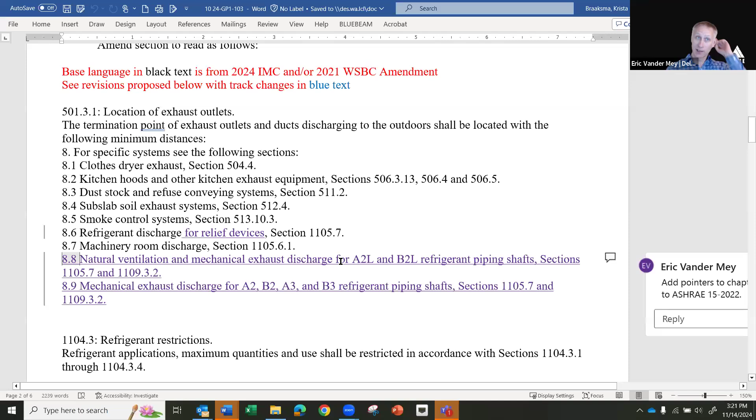All right, so I think all the remaining ones we have on the agenda are regarding refrigerants and chapter 11. So Eric, I know you submitted these, so feel free to take it away. Yeah, let's just go with the order on the agenda. So there's a number of code proposals to work through changes in ASHRAE 15 to try to correlate them to the mechanical code. There were 17 different interpretation questions that were responded to by the state building code back in September, posted probably sometime in October. So if you haven't reviewed those, they are a good reference for some of this background information.

So this specific code proposal is an attempt to clarify code requirements between ASHRAE 15 and IMC Chapter 11. As we know, the big change in the 2021 version is that you have to comply with both IMC Chapter 11 and ASHRAE 15. The current version of ASHRAE 15 is 2022, though there are dozens of addenda to address all the new refrigerants. So hopefully this one is mostly pointers and we can walk through these item by item.

So the first item I'm trying to clarify is item 8.6, which is just for the relief devices, the refrigerant discharge reliefs. And then adding items 8.8 and 8.9 to provide more clear language for the natural ventilation and mechanical exhaust discharge outlets for the A2L and B2L refrigerants and which sections you specifically have to go to. There is a pointer from Chapter 11 back to this section, but there's really no pointer that tells you which item you have to comply with. Some people think you need to comply with product conveying. Some people have been thinking other things.

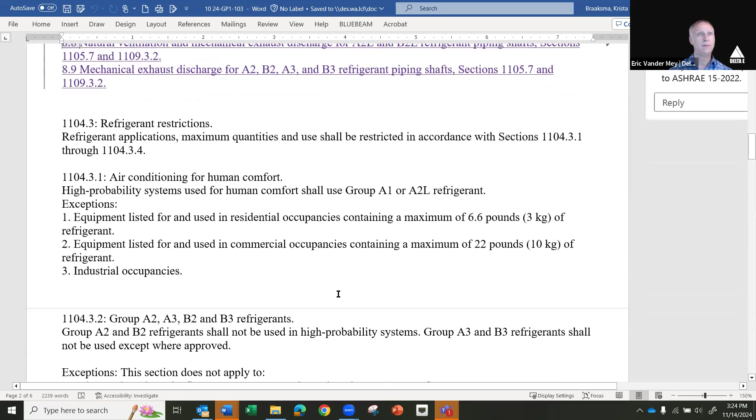Let's keep rolling through this. These are just sections for reference. The next item, yeah, that 1104.3.5 is a new proposed section. So with the A2L there are very restrictive requirements for public corridors and lobbies for the amount of refrigerant that can be in the refrigerating system. As part of ASHRAE 15, I think it's like 1 pound of refrigerant or something, very small threshold.

So this is a pointer to that section so folks know about it. As I said, we have to comply with both 15 and the IMC now. So this is meant to provide awareness to this section for these very limited quantities of refrigerants that are allowed for refrigeration systems in the corridor. I'll just keep rolling through these.

So 1105.7, so the mechanical code has had slightly different language than ASHRAE 15 for a long time for these refrigerant relief locations. Again, in the past, this only applied to actual refrigerant reliefs, like on a water-cooled chiller or something where you're piping a relief out. In this case, this is now extended to these refrigerant piping shaft ventilation discharge outlets. And so there is a lot of new ASHRAE language. So all this language comes from ASHRAE 15, 2022 to provide the appropriate criteria and correlate there.

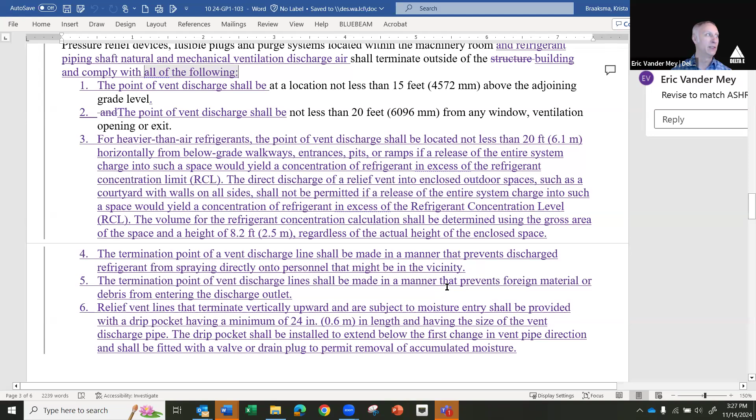So section 1109.2.5 refrigerant pipe shafts. Just adding a pointer that if we have these naturally or mechanically ventilated shafts throughout our buildings, that those walls are part of the building envelope walls and need to be separated with thermal insulation and air barrier construction per the energy code. So that's a clarification. That's again not part of any model code change.

Excuse me. There is a separate proposal for exception 2 of this section, I'm just including it here for reference. That is a 2027 IMC change that changes that exception to match the ASHRAE 15 language. So ASHRAE 15 does not have the words using group A1 refrigerant. And so you can use any type of refrigerant as long as you can dump that charge in the smallest occupied space through which the piping passes. So that's just to correlate. Again, there's a whole separate proposal for that in case this one doesn't get traction.

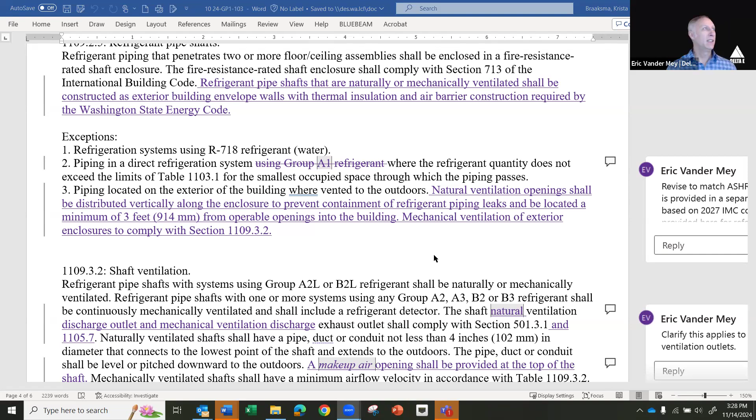The next one is, ASHRAE 15 and the IMC are both silent on how to deal with natural ventilation openings for refrigerant piping enclosures. So this is an attempt to establish some rule on these naturally ventilated enclosures on the exterior of the building to route refrigerant piping. So I'm proposing a 3-foot separation from operable openings into the building. And that the enclosures have to comply with section 1109.3.2 below if you're mechanically ventilating.

So then the shaft ventilation. So this is the section that governs the A2L and B2L, and in the 2024 code, this is slightly different than the 2021 code. You've been reviewing that. So both the A2, A3, B2, and B3 refrigerants are now combined into the same section for shaft ventilation. So they've reduced the number of sections here, but they say that the certain types of refrigerants there have to be mechanically ventilated and have the refrigerant leak detector.

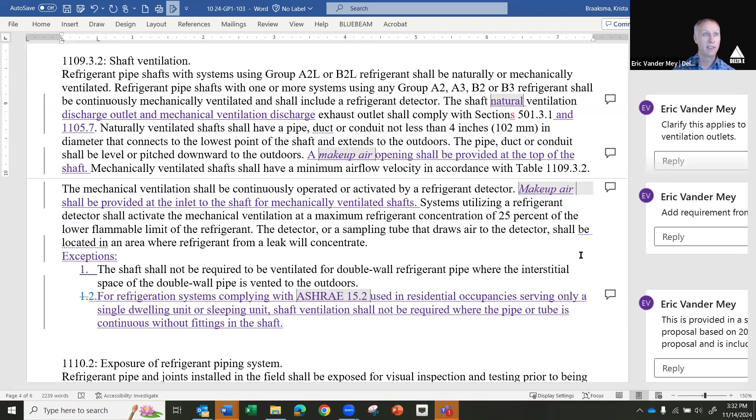And then the very last item, 1110.2 is something that came up in the Seattle code process for the 2021 codes, which was if you have pre-insulated factory insulated refrigerant piping line sets, that you don't have to expose that insulation in the field to inspect the pipe.

So this section requires both the refrigerant pipe and the joints to be installed in the field and exposed for visual inspection. So the piping portion does not need to be exposed for factory installed piping systems. That's all I have. If there's questions, I'm here to respond to them.

Right. Thanks, Eric. And yeah, I don't know if we stated the background on this, but when the 2024 IMC was written, the ASHRAE 15 2022 requirements were still in progress. So there's a pretty big lack of integration into that IMC model code. So my understanding is that the intent here is really just to bring things up to speed and in line with what the current ASHRAE requirements would have.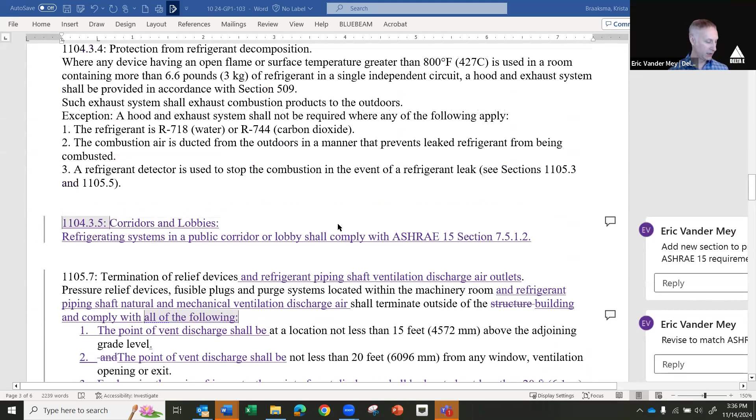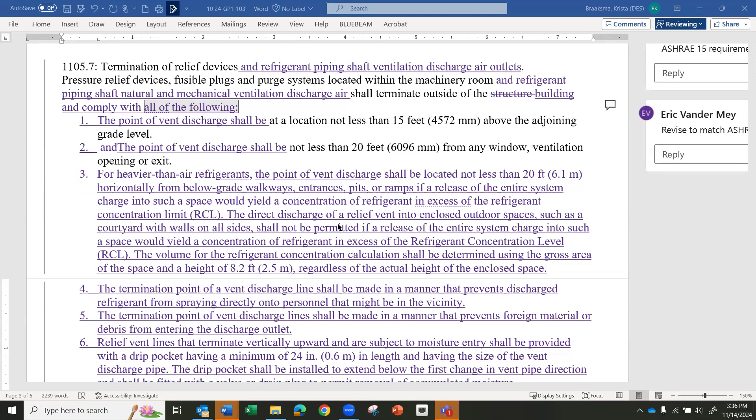All right, any other questions or comments regarding any specific items here or general thoughts? Yeah, this is Kevin. I had a question about the natural ventilation portion. There's the exterior enclosures, which could be naturally ventilated, or there's the interior shafts. Yeah, what's your question, Kevin? So you said ASHRAE 15 is silent about this. Where did the basis for this text come from? Yeah, scroll down to the section, that one, exception 3.

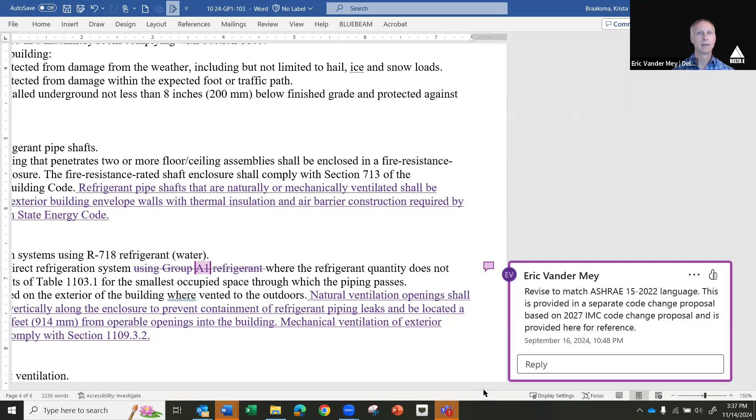So you're allowed to run refrigerant piping located on the exterior of the building where vented to outside. ASHRAE 15 and the IMC do not provide any guidance as to what is vented to the outside. What does that mean? Does 1 square inch of venting constitute venting to the outside, or is it more than that? Do the ventilation openings have to be evenly distributed? If you're running up a 40-story building, where do you have to vent that? There are VRF manufacturers and others developing guidance, but right now both ASHRAE 15 and the IMC are silent on how to do that properly. So this says you've got to distribute your natural ventilation openings vertically.

I'm not proposing giving guidance on a minimum free area or whatnot. And then I'm saying that you've got to keep those openings at least 3 feet from a window. That was based on natural gas and how far we have to keep a natural gas meter outlet from an operable window. So that's where that 3 feet came from, operable opening. Cool. No, that makes sense. Good reasoning. I was just curious. Thank you. And then, if you're mechanically ventilating, you've got to basically comply with the shaft provisions. So cool. Thank you.

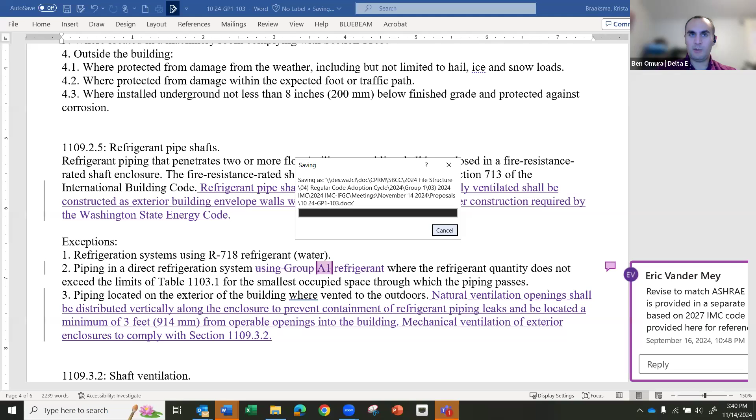So yeah, I guess are there any TAG members prepared to make a motion on this, or have other questions or other thoughts on how we can proceed? Laura, go ahead. Yeah, I'm okay with making a motion to accept the code change proposal as written. Okay. All right. Motion from Laura. Is there a second for that one? This is Bill. I'll second that. All right. Any discussion on the motion?

Shadish, go ahead. So 2027 IMC code change proposals are the basis, but are those proposals accepted, or what if they are not accepted in IMC? Correct. Those proposals have not yet been reviewed, as far as I know. So we are a little bit ahead? Yeah, we're also going to be reviewing tomorrow with the council potentially adopting some of this language for the 2024 codes. Okay. Yeah, we definitely need this to be able to construct buildings.

There's a lot of people spending a lot of time looking at ASHRAE 15 and not connecting the dots here. So anyways, like we said, we have 17 opinions from the State Building Code Council right now on a lot of these topics, which are providing some direction. But again, this is just the first step in this process. From this step, it's going to go through council and through public review. So we have time to make adjustments if the 2027 IMC proposals were to change. Those 2027 IMC proposals are coming from the ASHRAE 15 committee itself, so it's pretty solid language.

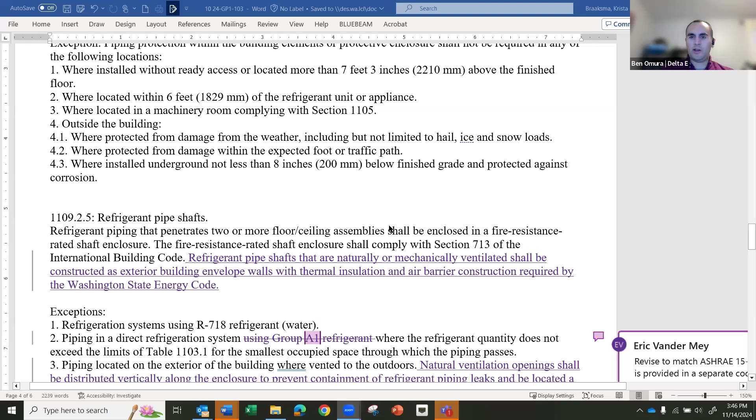Okay, so it's in ASHRAE 15 currently. So if we approve it as is, we anticipate it being carried through. All right, I'll just leave my motion as is to accept the change proposal as written. Any other comments on the motion on the table? I think there's a small editorial change that was made, so I'm assuming the motion includes that editorial change. I forgot where it was, but it's just adding an S somewhere. Laura and Kevin, I don't know if that was your intent. Yeah, sections. Okay. Yep.

All right, let's do a quick voice vote. All those in favor of recommending adopting this code change proposal as written with editorial edits, please say aye. Aye. Any opposed? All right. Motion carries. Oh, sorry, just a note, I wasn't the second on that one. Oh, were you not? It was Bill, sorry. Thank you for clarifying. Bill, you're okay with that editorial amendment? Yes, I am. All right, all those in favor, please say aye. Aye. Aye. Aye. Any opposed? All right, motion carries, thank you.

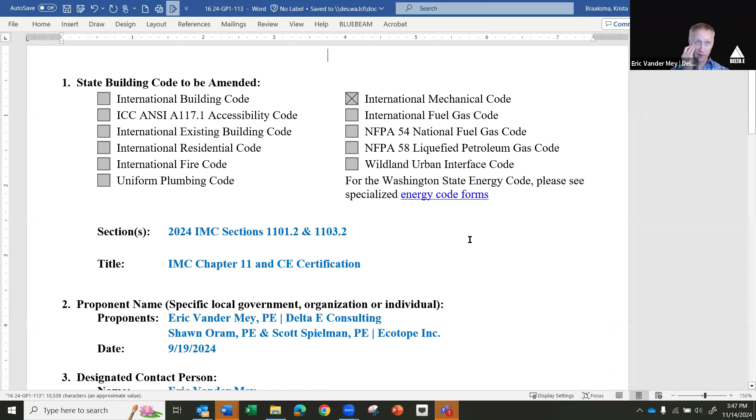Okay, Ben, if we can go out of order, I'd recommend going to item 13 on the agenda and then back to item 12, because those are the quick ones that are duplicates in that proposal. So not this one, Krista. Item 110. GP1 109. Yeah, 109 and 110 are the two that are probably easy to get off the plate in the last couple minutes, starting with 110.

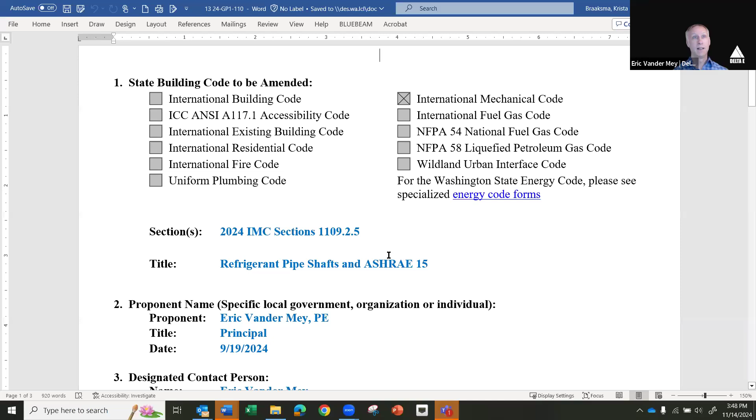So which one is this? 110. So this is the one I mentioned that strikes the 4 words. I did submit this as a separate proposal in case the editorial language didn't come through. This proposal does have the backup language, as I mentioned. These 4 words are not in ASHRAE 15 2022, and the ASHRAE 15 committee has submitted a code change proposal to remove them from the 2027 IMC.

So, I would like this one to go through separately in case the other one gets resistance, as a parallel path would be my recommendation. Got it. Yeah. So thanks for clarifying this. I hope everyone read through this, but my understanding of the intent is that this reduces the restriction for refrigerants and allows the design analysis to be done for A2L and other refrigerants for installation purposes, to greatly provide more flexibility for installation.

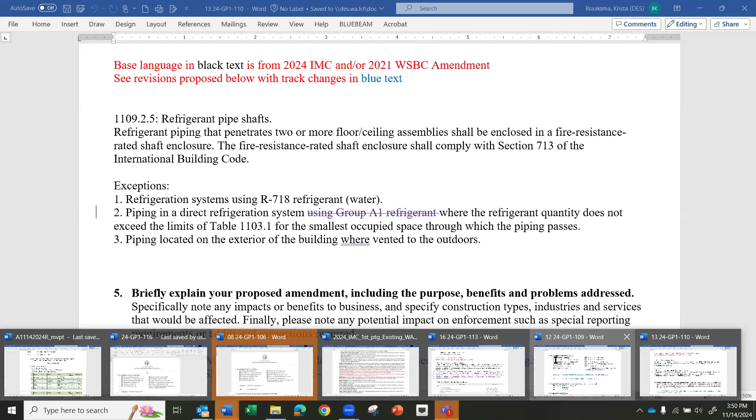All right. Hearing none, all those in favor of recommending adopting the code change proposal as shown, please say aye. Aye. Aye. Aye. Any opposed? All right, hearing none, motion carries.

So this proposal is 109. Again, this is also a 2027 IMC proposal. The ASHRAE 15.2 standard is a new standard that was developed for single-family homes, as well as refrigeration systems installed in multifamily dwelling units, where the system, like a mini split heat pump, only serves a single dwelling unit, so it's not allowed to serve more than one dwelling or sleeping unit within the multifamily structure.

So all this language for the 2027 IMC is again from the ASHRAE 15 committee, and hasn't gone through the public review process, but is the language being proposed to provide the correlation to ASHRAE 15.2 2022. So this again provides more flexibility, and this standard's more tailored towards single family homes and/or multifamily, so you don't have to review the entire ASHRAE 15 standard. It's tailored to just those occupancy types.

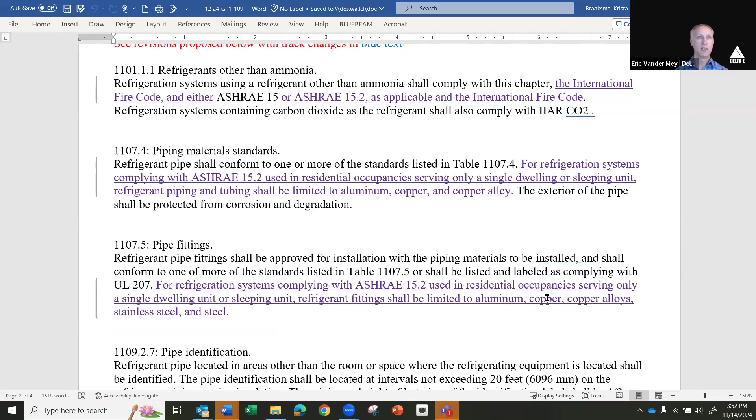So the first statement: either comply with ASHRAE 15 or 15.2 as applicable. And then there's a reference to this in the piping materials section of 1107.4 and the pipe fitting section of 1107.5. And then there's an exception in 1109.2.7 for the piping identification requirements that have to be followed. Again, I think there's changes in this section in the 2024 code. And then there's clarifications for this exception for the shaft ventilation.

So essentially, you're allowed to have a shaft, but that shaft does not have to be vented, as long as you do not have any pipe fittings within the rated shaft. So it's a little bit different provisions than the ASHRAE 15 provisions. And then there's the requirements for 15.2, or just adding the reference to 15.2 2022. So again, all this is the exact language from the ASHRAE 15 committee proposal for the 2027 IMC. Thanks. Thanks. Justin, go ahead.

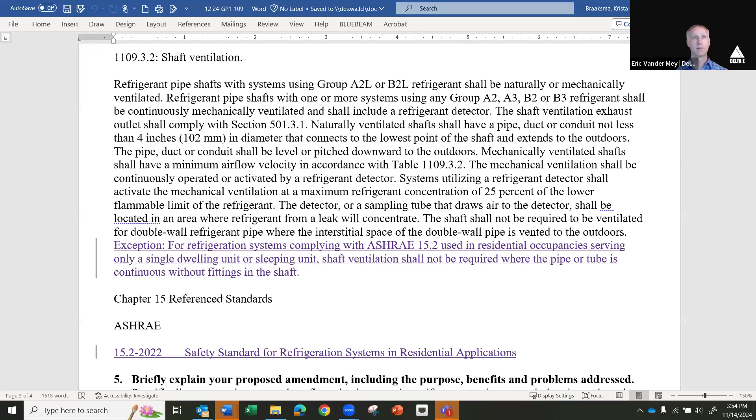Can you roll up to 1107.4, please? Sorry, I thought I had unclicked myself. Right there. So copper alley, it should be alloy. It's a little edit to do there. Oh, yeah, you're right. Thank you. Typo. Thanks, Justin. Yeah, ALL. Oops. Yeah, there you go.

All right. Any other comments here? I think the proposal had included the 2027 proposed changes to the IMC model code as part of it, so you can reference those. But yeah, like Eric said, it looks like it's the exact same language.

Laura? Go ahead. I think I need a little more time on this one. I don't think I've gotten to this, so, gosh, we're 3 hours into this. Is there a way we can table this one? I haven't had a chance to look at this one, so I'd suggest that we put this at the top of next time, and I'll be able to take a look at it for next time. I want to have a little time to look at this before saying it's okay.

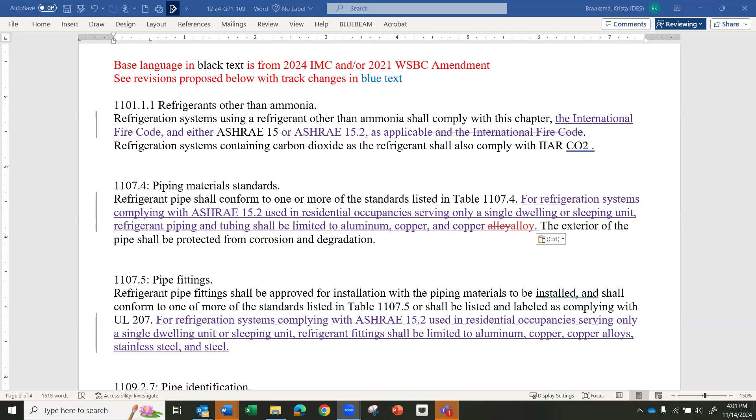I'll put it out there if there's any other folks on the TAG that want to be part of the correlation meeting next week. I'd suggest that staff put out the email request to TAG members that might be interested, and hopefully we'll know the time for that meeting. Dustin should be done with his TAG meeting now, so I can ask him what time they had intended. The correlation TAG meeting is scheduled for the 19th, 1 to 4. I can send that meeting invite to all the TAG members, and if you want to attend, you can. Okay, that sounds good. The meeting invite info will be on the website as well. All right, perfect.